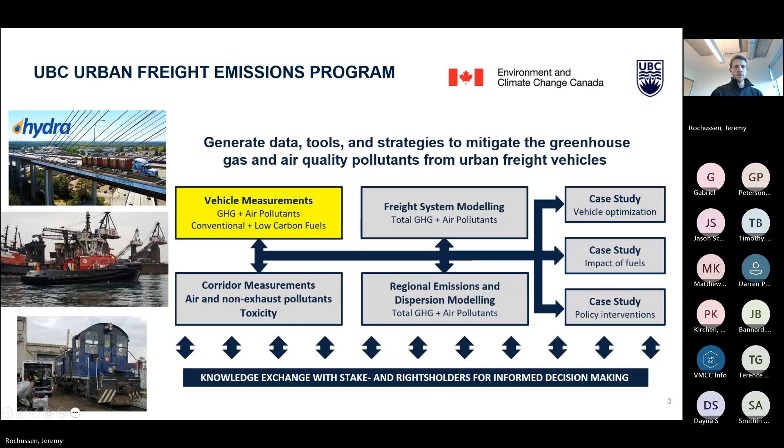Here's our research team, really just showing this to highlight the very multidisciplinary group that we bring to this problem. Our team leads are Amanda Giang and Patrick Kirchen, but we also have profs from atmospheric chemistry, from medicine, from chemical bio.

We also have a very large graduate student cohort. This is really just to highlight that not only are we generating data and tools, we're also generating a workforce that's familiarized with the real world problems around air pollution, and they continue on our legacy after the program ends.

Okay, so stepping back now and looking more away from our freight systems, now really onto marine. If we think about how air pollution is being considered for marine, it's been sort of the same story for a very long time. Our existing fleet is a significant contributor to greenhouse gas emissions, and the IMO has recognized this and has reduction targets that I'm sure most of us are familiar with. But it's important to understand that the way we've been thinking about this is based on a very homogeneous existing fleet.

These engines are sort of the same diesel engine construction. Many of the same fuels have always been used. And so the emissions concerns that we have around things like CO2, NOx, SOx, maybe PM, that story has kind of been the same for quite a while. And so when we have been making decisions about investments from a fleet or port perspective or environmental policy, existing frameworks have been reliable methods to look at this.

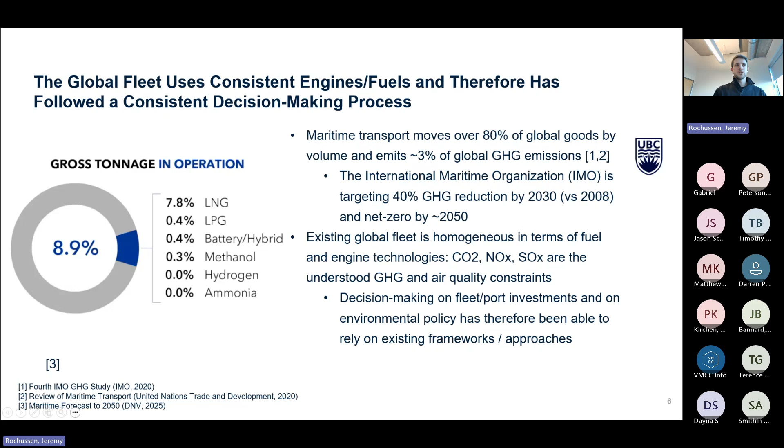We can't necessarily rely on the data and tools that we've used in the past. And what this really means is that as we're making these long-lasting decisions and investments, we're going to have an increased need for reliable emissions data to be accessible, both for capital investment, but really also for policy.

IMO has recognized this. I think Pat showed this at the Green Ship Conference as well, but this is the fuel life cycle label. I think of it as an acknowledgement that we can no longer rely on just a single default emission factor or emission data set for all fuels to think about GHG reductions. We have to actually start thinking about actual emission factors.

These actual emission factors, I won't get into too much detail of the different components of the life cycle label, but you can roughly think of it as the well to tank emission factor, so all the upstream production pollutants, and this is really just looking at GHG. So you'll see that's always measured in grams CO2 equivalent per megajoule fuel. And to that, we add the tank to wake emissions, so what comes out the stack of the vessel. That'll be very sensitive to the types of fuels and the types of engines that are being used.

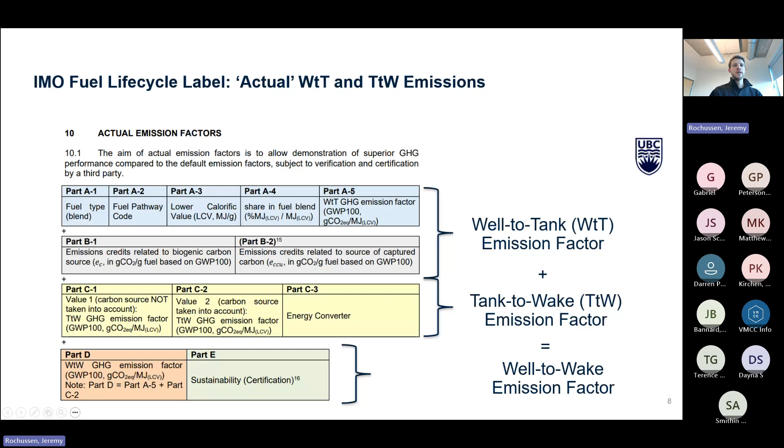That tank to wake piece will really be the topic today. Adding the well to tank and tank to wake gives you this well to wake emission factor, and that's ultimately what we're caring about when we're talking about these emissions. We want to understand the overall impact of our operations and how to minimize it.

So taking now more of a local lens, we have a variety of different fuels that we can look at to reduce our carbon intensity. This plot here is looking at using data from the BC Low Carbon Fuel Standard and measuring each of these different alternative fuels in grams of CO2 equivalent per megajoule fuel, so mass emissions per unit of fuel.

Each dot represents a specific fuel path, and each one of those dots in a marine context is a well-to-wake emission factor. The difference in these dots, and you'll see some of them have a really large range, almost all of that is due to basically different upstream pathways, so different well-to-tank emission factor values. So for these alternative fuels, especially biodiesel and renewable diesel, the manufacturing process, the transportation process, all of that has a significant impact on the actual life cycle carbon intensity.

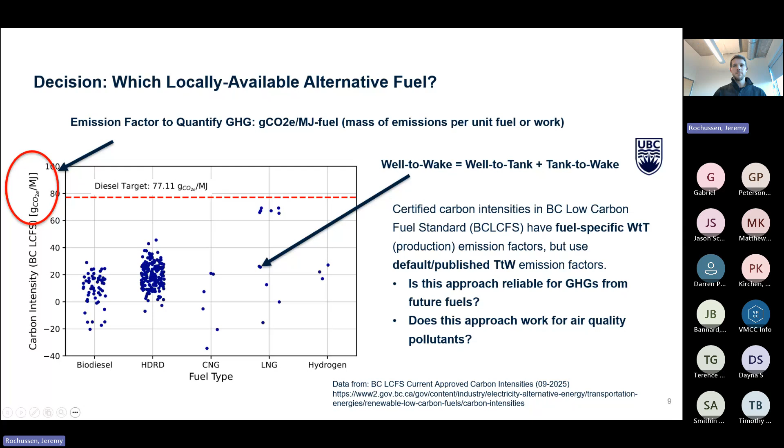However, what's not actually captured in these is the tank to wake. Except for a very small amount of special cases, default tank to wake emission values are used to generate these carbon intensities. This raises two important questions from our perspective: for these future fuels, how reliable will these standard tank to wake emission factors be? Can you use that to make decisions? And now that we're concerned with air quality, especially around urban freight areas, will these static tank to wake emission factors be reliable there? Can you make decisions based on that?

So today's talk will really be looking at the fuels that are most relevant to us right now, which is the biofuels and the LNG.

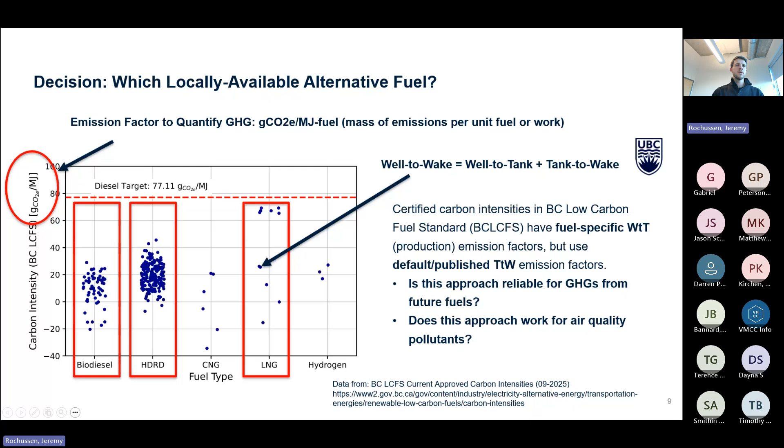If we look at CO2, and this is real data measured from a local vessel a few years ago, we see a nice straight line. So the mass of emissions that comes out of this vessel per unit work produced is constant. The question is, how well does that hold when we look at other pollutants?

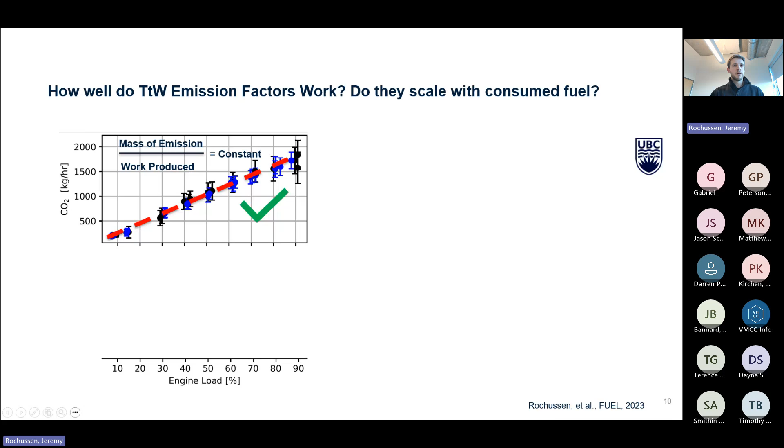The two sets of lines for each one of these is actually the same vessel, just the engine is being recalibrated. But the real takeaway here, without getting into the details, is that there's no straight line you can draw through any of these. And any vessel could actually have multiple different calibrations or impacts.

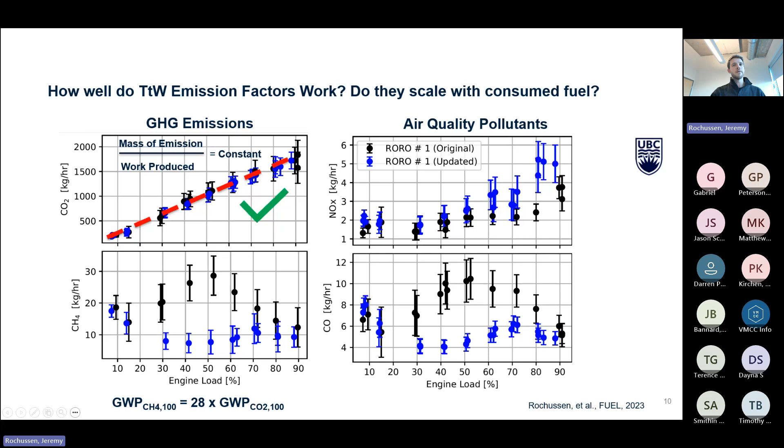This really draws into question how it is that we can make decisions, either on air quality pollutants or GHG emissions, confidently, and make investments based on that, when these other air pollutants don't really follow the same tank-to-wake emission factor rules that we've relied on with CO2 and conventional fuels.

That's really the motivation, the objective of our marine emissions program: to generate decision-grade data for tank-to-wake GHG and air quality pollutants relevant to the maritime sector, and specifically relevant and useful for urban and port settings. This is for standard fuels, the existing fuels, as well as the currently in-use low carbon fuels, and eventually we'll be moving towards future fuels, helping get some early data on these other fuels being considered.

When I say decision-grade, and I'll use that term a lot in this presentation, what I really mean is that the data can be used confidently. The data is robust and can be used for planning and policy development or technology selection, really answering specific questions. To us, this means it includes quantified uncertainty, it takes into account the real world variability of these vessels, and it also has some consideration of the operational impacts.

So our approach for developing decision-grade data, we can think of this in terms of data quality. Obviously we want the maximum quality possible, but we have to weigh this against the cost of collecting it. Because we're talking about real world systems, it's quite expensive to go out onto a vessel and change their operations, or allow them to install our equipment. So we have to weigh our data collection methods, both in terms of the outputs and the cost of the inputs.

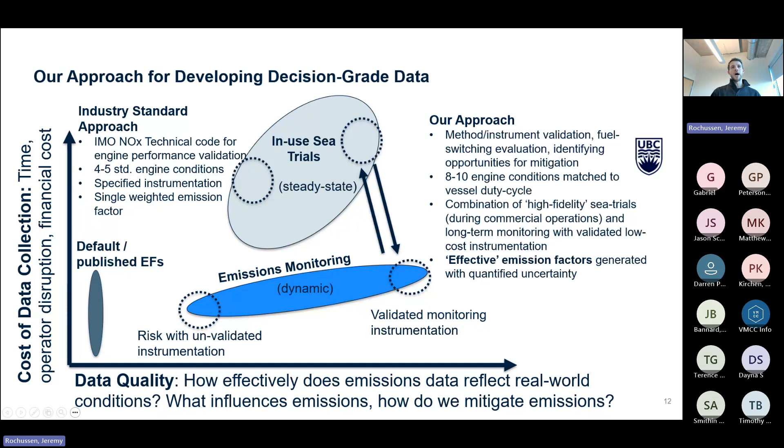Starting off with the in-use sea trials, the standard approach follows the IMO NOx Technical Code, which is designed for validating engine performance, not for generating new emission factors. Our approach is a bit different in that it combines these steady state sea trials, in a slightly more expensive way, but we combine them very intentionally with emissions monitoring.

And we do this in a way that's designed to match the actual use case of the vessels we're studying, to validate the instrumentation we can use for monitoring, and to generate what we call effective emission factors. These are the link that allows our tank-to-wake emission factors to become more decision-grade than standard emission factors you might generate.

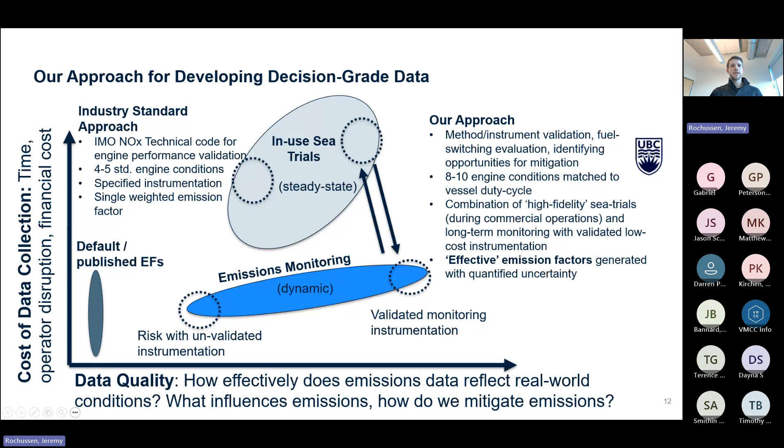We've been operating this program for 7 or 8 years at this point, all in local applications. We've had good fortune to collaborate with some great partners. Some of the vessels we've measured on are shown here, along with the different types of fuels we've been able to measure.

I want to highlight the routes we look at, to show that these are operating near where people live. So there's an urban component, and they're also very dynamic, with different navigational constraints through things like Active Pass or the Fraser River, or traffic through the Georgia Strait. All of this puts extra emphasis on better understanding air quality pollutants, and on capturing the impacts of those dynamic duty cycles when we talk about effective emission factors.

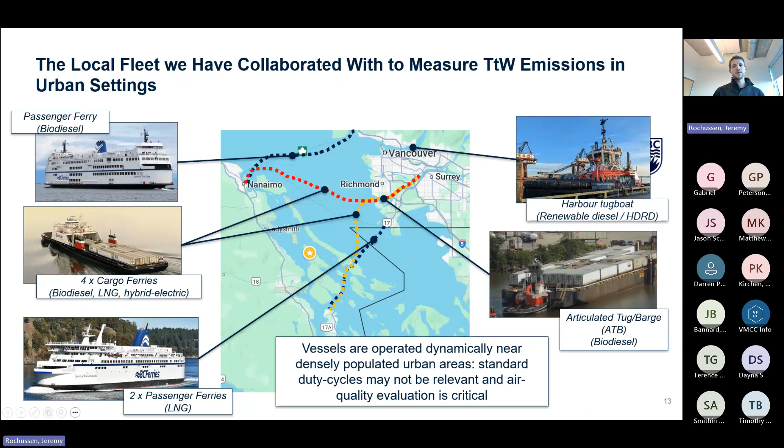So what does it look like when you actually do a sea trial? What is the instrumentation we bring? We'll go into the engine room, install our equipment, and bring a series of different sample probes directly into the exhaust of the engine.

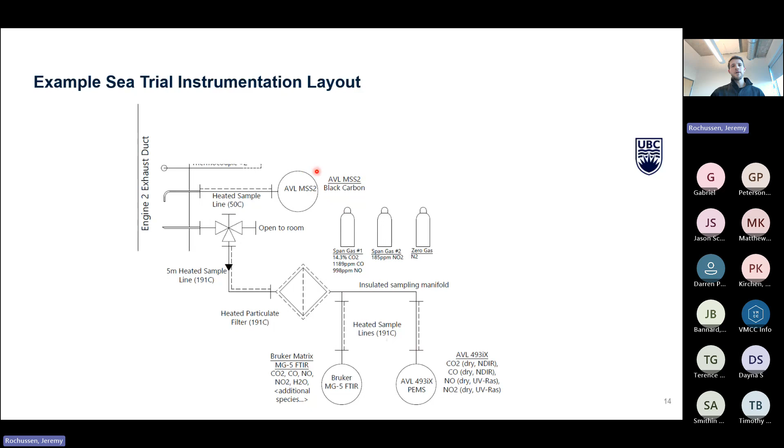Sometimes we're fortunate to have existing access; sometimes we have to ask our partners nicely to install ports for us. We typically have a couple of different ports that go in, leading through an extractive sampling system with a series of different instruments, each with different capabilities, measuring in parallel. We'll have a black carbon instrument typically if we're measuring biodiesel, and we'll always have a couple of gas phase instruments.

Those instruments all have very different costs and capabilities. For example, we have laboratory grade instruments and certification grade instruments. These are all very difficult to bring, but they provide a certain level of quality we can rely on because we have calibration standards.

The other thing we do in parallel is bring a monitoring system. That system operates alongside the high quality sea trial data set, but it's a much lower cost instrument set.

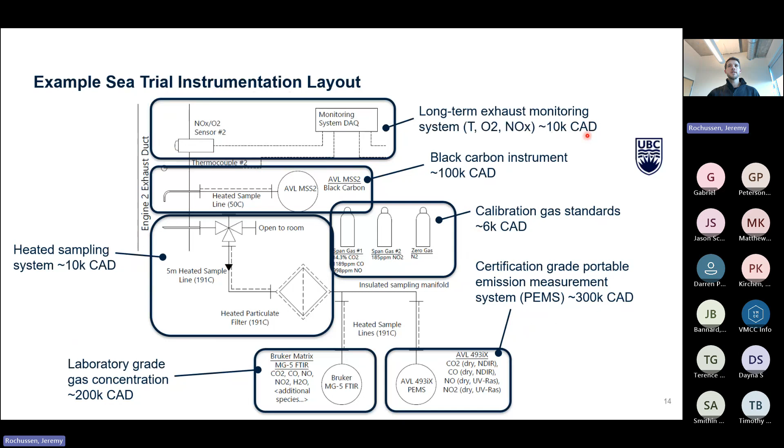This is a photo of what that looks like. We'll set up for sea trials - the vessel is put on whichever fuel we're interested in for some period beforehand so we're confident we're looking at the intended blend. Then we install our equipment in the engine room. In this case, you're looking at the fiddley 6th deck of the Queen of Oak Bay from BC Ferries. The exhaust is over here, with ports located up around here, and we have sample lines that come down and extract exhaust gas, leading to our different analyzers. We have a black carbon instrument here.

We have our certification grade gas emission exhaust gas analyzer here - this comes from the on-road heavy duty sector. This is our laboratory grade instrument. And over here, we have our monitoring instrument.

This is a nice application where you have lots of space. However, sometimes we're operating in the engine room and it can be quite intrusive, so this is not really a viable approach for doing all sorts of emissions measurements - it's really for dedicated cases where we're trying to do detailed characterizations.

So we'll measure each fuel, doing sea trials during commercial operations. As they're doing the crossing for BC Ferries, we'll get them to hold certain loads for 20 minutes at a time, get a steady state measurement, move to another load, get a steady state measurement, and repeat until we scan the full operating space of the vessel.

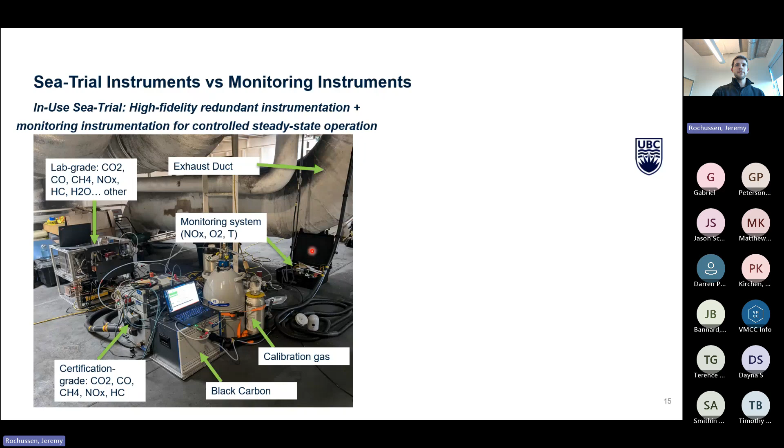After we've done each sea trial, we pack up all our equipment and leave. But we typically try to leave just our emissions monitoring system, and that system will live on board for weeks or months, continuing to collect data.

In this case, this is a NOx sensor used for biofuel analysis. The great thing is that NOx sensor, that monitoring system, was living beside the sea trial data set through all of the sea trials. So we actually generate this large data set of in-use validation data to understand exactly how well that system performs in the real world for real fuels.

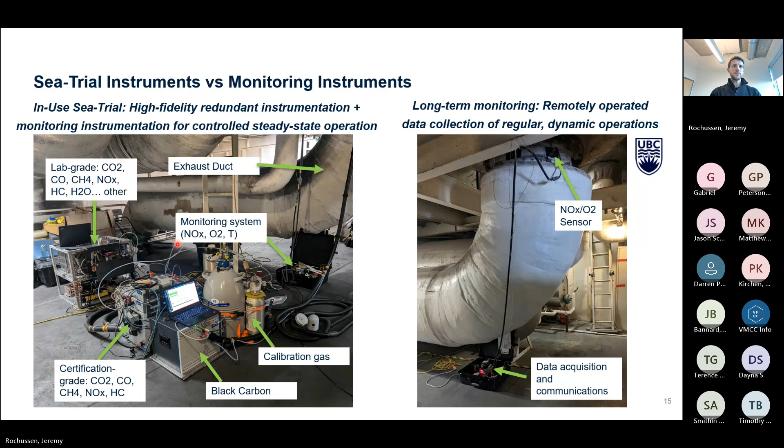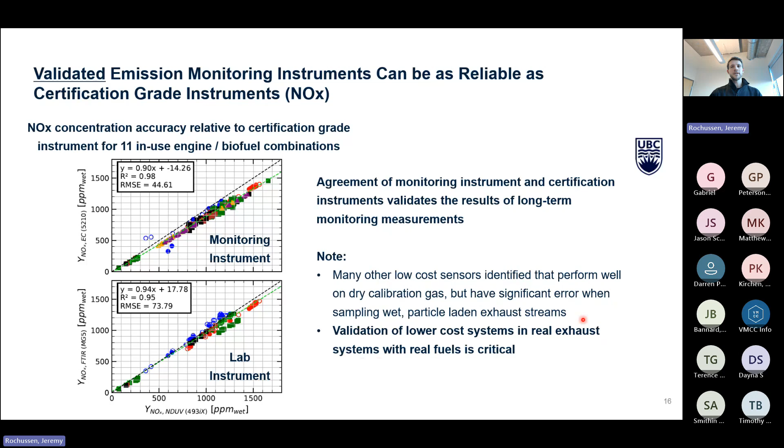There are a lot of low-cost sensors we've identified and tested that work very well on calibration gases, which are dry and don't have particles in them. However, when you bring these onto real engine exhaust, they perform differently depending on the fuel sometimes, and can be wildly wrong under certain conditions. So doing this validation process in the real world on real exhaust is a really critical takeaway.

So that was a little bit about the methods we use. Now the next part of the presentation is looking at the tank to wake emission data we generate, focusing on two relevant case studies: biodiesel as a drop-in fuel, and LNG, of which there are a variety of vessels that operate locally.

With the biofuel, this is interesting because it's a drop-in fuel. So now you have engines that weren't designed to run on biodiesel being tested with a variety of different blends. How do air quality pollutants such as NOx, PM, and black carbon change with those different engine types and fuel blends?

With LNG, the question is more about the GHG reduction. With LNG we always get an air quality improvement, a very significant one in terms of NOx, black carbon, and PM. However, the GHG reduction is a question, and that comes down to the unburned methane, the methane slip in real world conditions. So we want to understand what strategies exist to minimize that slip, and how those dynamic off-cycle duty cycles these vessels locally have impact those methane emissions.

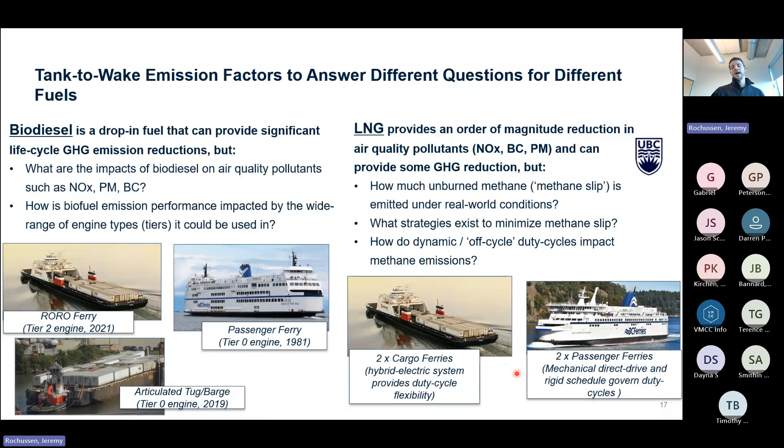The vessels we use to answer each of these questions have different features that help paint a broader picture of the considerations. I'll start off with the LNG vessels and some sea trial data we have for methane slip.

The data shown on the right here is emission factors for methane, so grams of methane per kilowatt hour. We've measured it for 3 different vessels, the black, the red, and the blue. For each vessel, we also looked at engine manufacturer supplied recalibration designed to reduce the methane slip, so there's 2 curves for each plot.

Original means this is how the engine was delivered. Updated means this is how the engine performed after the fleet operator requested that the methane emissions be reduced. It's unfortunate that you have to ask for methane emissions to be reduced, but that's the reality.

So there are some general takeaways from these plots. The first is that for each of these 3 vessels, the methane emission rate can increase by about an order of magnitude as you go from high load to low load, and that's true for each one. What that means is the duty cycle, whether you operate at low load a lot or high load a lot, will be very important for your real world GHG emissions.

The second thing is these upgrade packages you can get for these engines have quite a significant range of effectiveness.

In the case of the black lines and the blue line, you can see that the updated curves are significantly lower for large portions of the engine operating range compared to the red curve, where you basically get no benefit except at the very low loads.

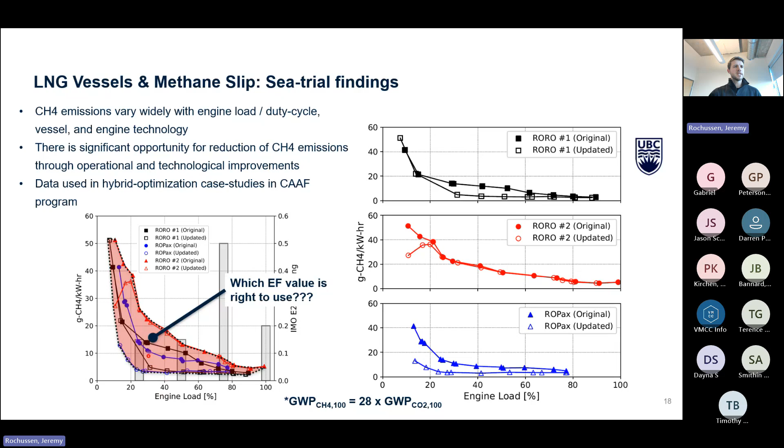This leaves you with a question: if we're trying to come up with a single emission factor for methane, and you're not able to do these measurements yourself, stacking them all on top, you actually have a very large range of different emission factors that you could reasonably select. This leaves you with the question of which one is actually the right one to use, the most accurate one, and that information isn't exactly clear even though you have these data sets.

So what would be the typical way to combine this and generate a single tank-to-wake emission factor? The IMO E2 cycle, shown here, is a weighting scheme used for engine certification. What it says is you take one of these curves, measured or from published data, and do a weighted average of it at specified loads - 25, 50, 75, and 100%. Regardless of how the vessel actually operates, you take a weighted average at those loads and it generates a single emission factor, and that's our output value.

It doesn't take into account the real world duty cycle. So our approach with effective emission factors is to take these curves but also combine them with days of sailing. Each blue dot shown on this plot is one day of sailing for that specific vessel with our sea trial data applied.

This allows you to generate what we call an effective emission factor, so you can take an average of all those different days of sailing, but it also gives you a spread of how much variability you get in those emissions. That's because each day of sailing has different constraints - there's more or less low load operation, for example. And this is important to understand.

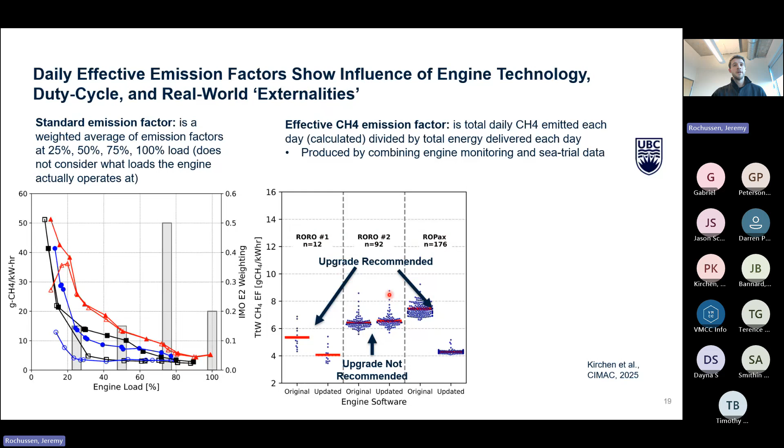The other thing you can see from this is that it gives us a very clear answer to some specific questions, like whether these upgrades are recommended for a given application. For example, on vessel 1 and vessel 3, you get significant benefits, while for vessel 2 you basically get no benefit whatsoever. So combining both the duty cycle and the real world emission rates is important to help fleet operators make these types of decisions.

The other thing it enables us to do is look at the maximum range these vessels could potentially achieve in emissions performance. On the left, the opportunity would be combining theoretically the best engine we've tested along with the best duty cycle, and you can see this gets down to a very, very low emission factor, a significant benefit in total GHG versus diesel. Or there's a potential risk: if we had a vessel with the worst of the engines we tested, constrained to the most challenging duty cycle, we now have an emission factor significantly higher than anything we saw from the real world cases.

Any of these effective emission factors are realistic and reasonable to expect. So it's really on the fleet operator to understand their operation and take steps to actively mitigate GHG emissions from these vessels, whether through duty cycle optimization, technology upgrades like these calibrations, or ideally both.

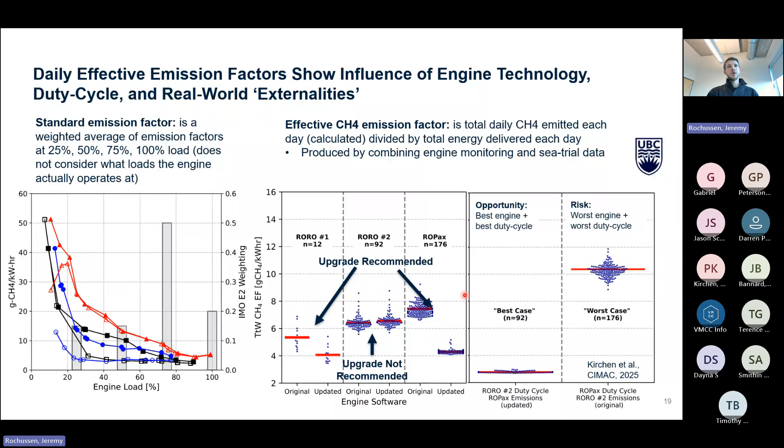Okay, so that was the quick story of LNG. Moving now into the biofuel blends - what we talk about locally, and I'll only be talking about the FAME biofuels, fatty acid methyl esters. These are coming from soybean, canola, or waste cooking oils typically. I'll refer to B5 as our standard fuel, nominally a 5% bio blend with 95% petroleum diesel. Then we'll look at blends of B50 and B100 to help understand the trends of emissions as you increase the fuel blending.

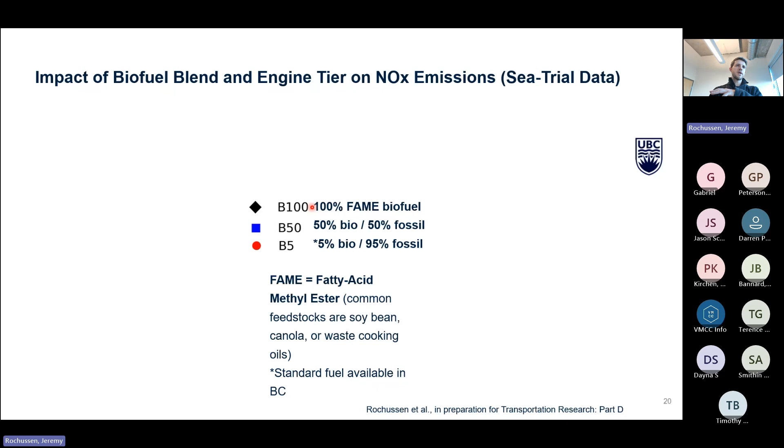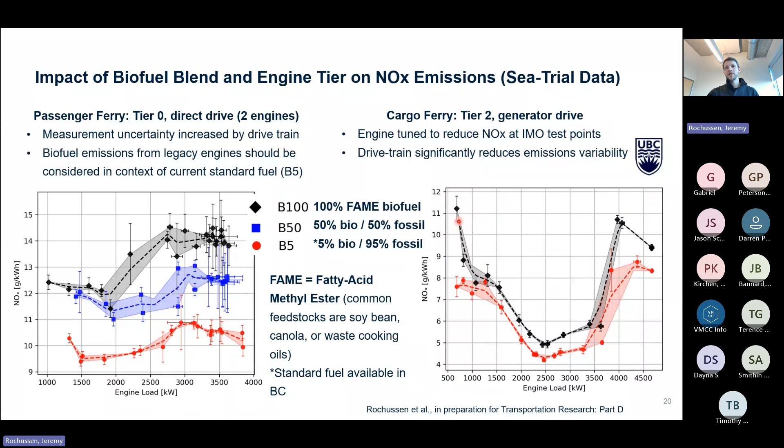We can look at other vessels as well, so newer vessels, and this is a tier 2 vessel now. Slightly lower NOx emission rates. You can see the scale here is a little bit lower, but we also notice that the shape of the emission curve is much different. This is because it's a tier 2 vessel.

It's being tuned to reduce NOx specifically at these limits. So you can see where those red lines are - those are the 25%, 50%, 75%, 100% load points I mentioned from the E2 test cycle before. We can see clearly that the engine has control parameters used specifically to reduce the emissions at those points.

We can also notice that the variability in the data points is a lot tighter on this vessel than it is for the other vessel. That is mostly due to this being an engine that operates as a genset. So the engine connects to a generator, and that generator drives electric drive motors for the propulsion. This removes all of the drivetrain variability that can impact the engine load by modifying it dynamically, even while you're nominally at steady state.

So the thing to think about is, looking at the difference between these two curves, we actually have a lot more confidence in the difference between these because the variability is so much lower than with these ones, where the error bars start to overlap in certain parts of the operating range. So it just goes to show that not all data is created equally, and it really depends on each vessel's application.

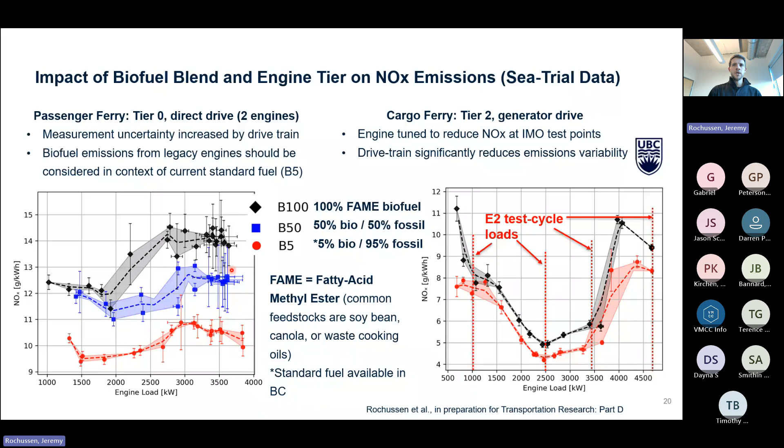Another way to look at this data and combine it for multiple vessels at once is to look at the relative changes. So instead of absolute values of NOx emissions, I'm now showing a delta NOx, a change in NOx as a percentage. For these B50 cases, this is the NOx emission rate at B50 divided by the NOx emission rate at B5. And what we see is an increase in NOx emissions.

It varies quite a bit - you see sort of 10 to 15% for one vessel, 15 to 25% for another one here. Generally increases for the higher blends as we expect, but then we have a much lower, much less significant NOx penalty for that tier 2 vessel that we saw here.

Other thing to note is that these curves have a few different features worth noting. We're actually looking at the real operating range of the vessel. So rather than talking about, for example, this vessel's 100% load NOx emission rate - that vessel never operates there, so that engine operation point isn't actually relevant to the real world questions you'd be asking.

The other thing is that we have these shaded regions around each of these curves, indicating the measurement confidence, or the uncertainty of those measurements. One way to think about that is where these start to overlap with each other is an area where, if your decision is based on whether this fuel is giving higher or lower emissions, you need to acknowledge that your data may not be enough on its own to make that decision for you. This is something we find really lacking in a lot of the discussions around emission factors, and it's an important message we're trying to get across to people who think about these things.

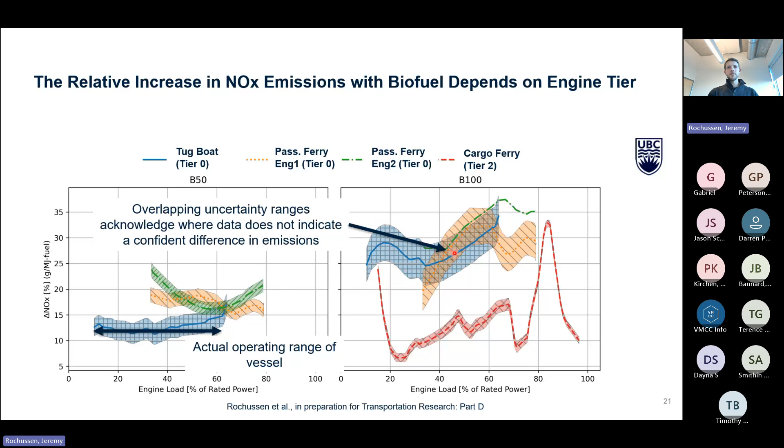So all of this is still sort of steady state emission factors. The vessels, as we mentioned, don't necessarily operate at steady state. So the next thing we can do is turn to our monitoring data.

So this is now looking at effective NOx emission factors over several months. We have a NOx monitoring system installed on an articulated tugboat operating on B100 for almost an entire year. Each dot here takes the total measured mass of NOx for that sailing and divides it by the total fuel consumed, giving an emission factor in NOx per megajoule fuel.

Because we're measuring on a day-by-day basis and not relying on sea trials, you start to get these long-term trends in the emission rates. It's no longer a case where sea trial data gives us a static number valid at all times. In the real world, the vessel's daily operations show some variability, that's the width of this bar. But throughout the season, things like temperature changes or fuel supply changes also cause significant changes in the real world emission factors.

We can also do some interesting things like looking at in-tank fuel blending without having to go out and install new equipment. Because we validated these measurement instruments along with our sea trials, all we have to do is get the fleet operator to do some in-tank fuel blending to see what the effective emission factors would be for a B5 to B100 blend. We also looked at a temporary swap to B5 just to compare these real world data points to the others.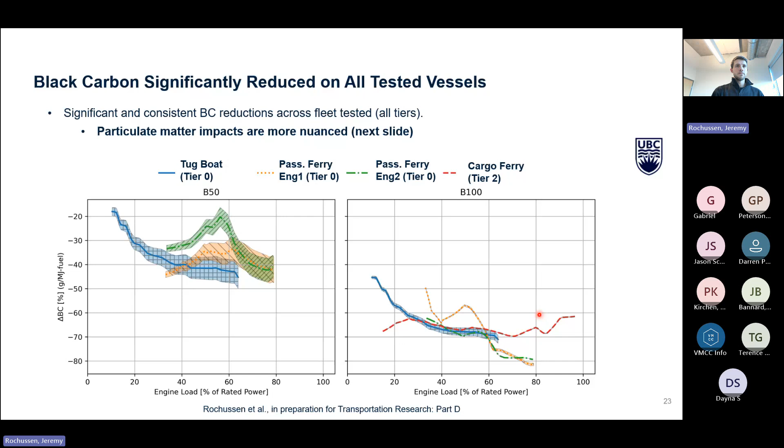To give a more intuitive feel for what this black carbon is, this is the actual soot you see coming out of the engine during dynamic operation. These two videos on the right were controlled dynamic tests, where the loading on the engine goes from idle, unengaged propeller, and then slowly ramps up to full load to simulate how the vessel would be operating as it leaves berth.

On the left, the B5 case, you can see a pretty clear black cloud. With the B100, it's really hard to see anything at all in this video. We've had feedback from some operators that this plume of smoke, especially operating in the North Vancouver harbor area, is actually a major concern for some fleet operators. So it's an important benefit to get rid of these visible emissions.

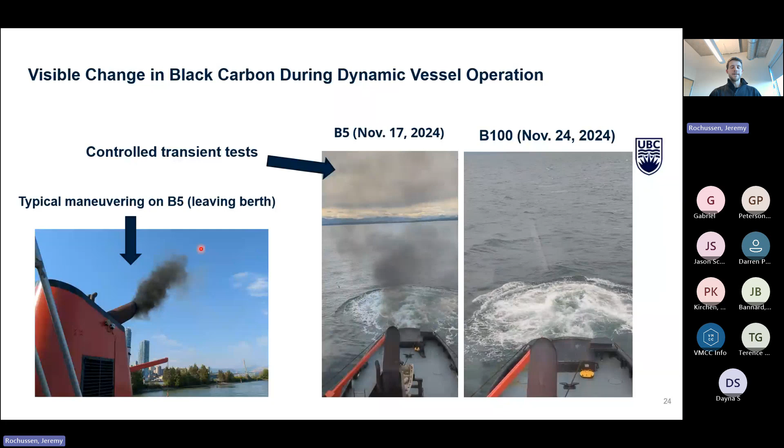But something important to note is that's only the black carbon, that's the visible part. We also have total particulate matter. It gets pretty complicated, but the total PM is both the black carbon component, the soot we saw, plus this organic carbon content. That's not something you see visually, but it's still additional mass from particles that can be fuel, unburned oil, or a variety of volatile components.

This is just a slightly different way of measuring those particle emissions. This is still black carbon, just showing that this new data set tells the same story as before: when you switch from B5 to B100, the black carbon reduces significantly. If instead you look at the total particulate mass, your total PM from the B5 fuel goes up a little bit because of this small component of potentially unburned fuel or oil. But if we look at B100, we actually see a significant increase in the total particulate mass.

This is something we're still actively working on to understand the implications of. It's really important to understand that as we get to these other types of pollutants that we're less familiar with discussing, the story about how we weigh them against each other becomes more nuanced, and it becomes more important to understand how they actually operate in the real world.

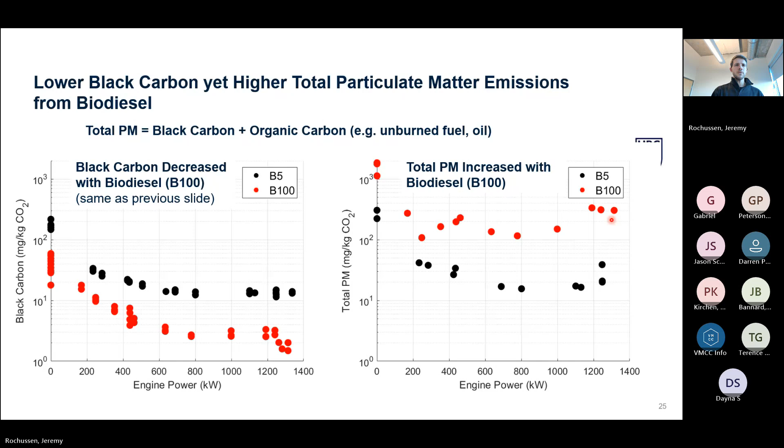To wrap up some of these marine emissions takeaways: on the LNG vessels, there are GHG benefits, but they're really dependent on the vessel's duty cycle and the engine technology installed. It's possible to have much more effective methane slip mitigation on these engines, but it relies on the operators being proactive. You can't just buy a vessel and assume it's doing the best possible job. It requires looking into it, and we'd argue that having data to arm you with that discussion is one of the best ways to approach it.

On the biofuel side, we saw from the LCFS that there are very significant GHG reductions possible with these biofuels as well as HDRD. However, this has to be weighed against air quality considerations. We saw NOx emissions increased for all of the vessels we looked at. The significance of that increase really depended on how new the engine was, what engine tier it was. The black carbon, the visible part of the exhaust, was very significantly reduced for all tested vessels, irrespective of engine tier. But we saw that total PM, on the other hand, was increased for the one vessel I showed data for there.

The high level takeaway I would make, and this applies to all marine fuels, especially in urban areas, is that for emission factors to be decision grade - which is how I'd argue we should start to think about these types of data sets - they really have to reflect vessel duty cycles in all cases. They have to reflect real world variability, and they need some comment on how much uncertainty there was in those measurements, because that can really change how you think about using them for decisions.

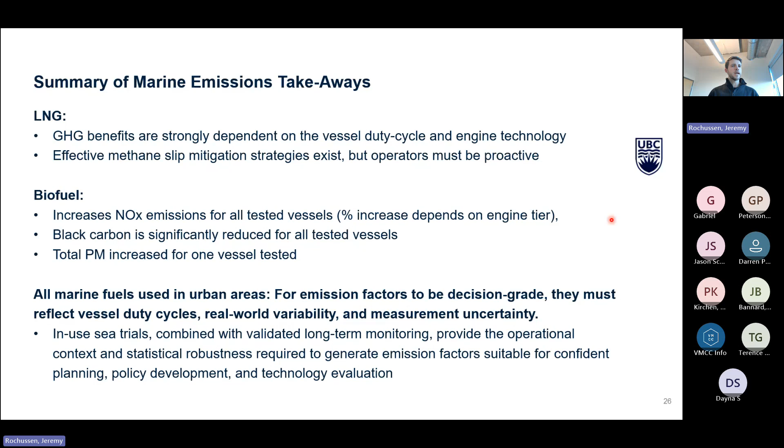Our approach for doing this has been to combine in-use sea trials along with long-term monitoring approaches. This gives us both the operational context, but also a more robust statistical understanding of these emission factors in real-world cases, which makes them suitable for decision-making like planning or technology evaluations.

My last slide here, I'll touch on our outlook for the emissions measurement program, again in this space of data collection and data quality. The first thing is sharing some of this data we've collected. We've been very active on the measurement side. We're now really starting to think more about how we share this data with people who can use it - getting it put into default values, but also sharing it in forums like this, in multiple different ways that suit different stakeholders.

We're going to continue with our in-use sea trials, but we're now thinking more about looking towards the future fuels - methanol and ammonia in particular - as well as maybe some conventional fuels with engine types we haven't looked at yet. For example, biofuels on low-speed two-stroke engines would be of interest, and we haven't looked at those yet.

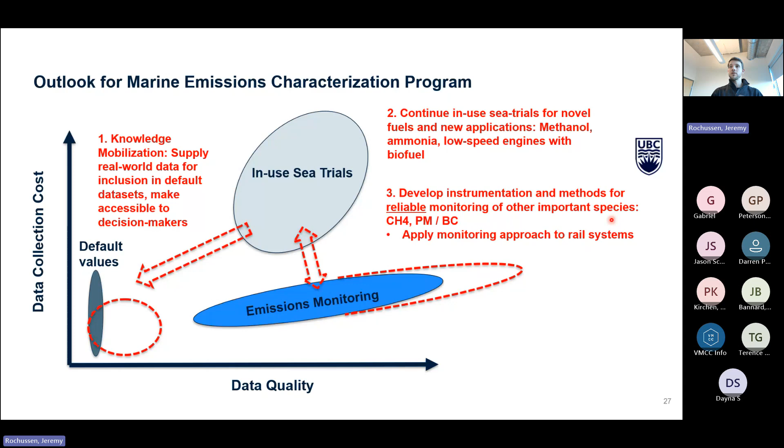The last piece is really building out our emissions monitoring capability. We have a good handle, or are developing a good handle, on NOx monitoring. We'd really like to extend this capability to other pollutants and emissions of interest - that would be methane, methane slip, as well as getting a better understanding of the particulate matter and black carbon problem I spoke about with the biofuels. We're also looking at extending some of these to other applications, so I mentioned rail is one of those.